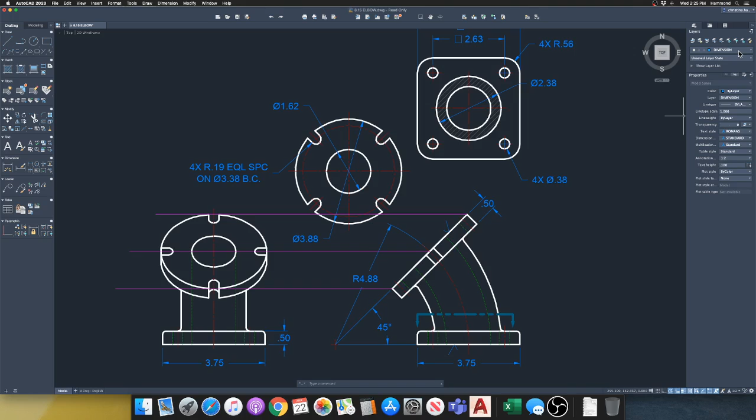I'm going to bring this over here straight across, and I'm going to bring this over here straight across. Okay, I'm going to actually change these to the elevation layer, and that way we can see it a little better.

Okay, so I have this. This is for the front view. Now this right here is a diameter of 3.88. It's this circle, but it is foreshortened because it's at an angle.

So when we have that, we have this center line that goes all the way through here, okay? But the top of it, the very tip top, is from this point over, and the bottom is from this point over. So let's start by doing an ellipse, and I'm just going to type in EL.

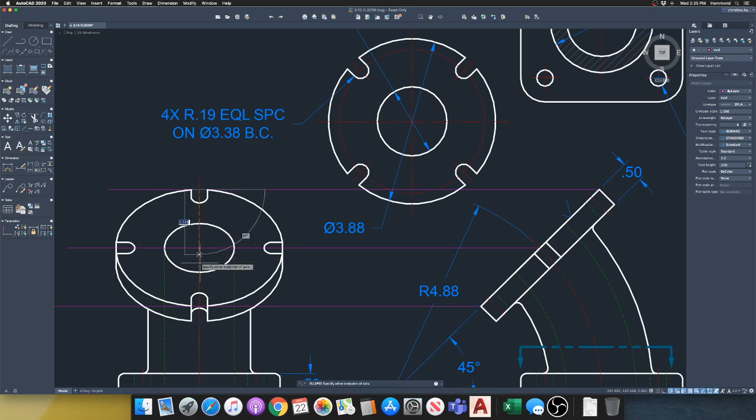I'm going to go from this point to this intersection right here, and then that radius is what we need to find out how wide it's going to go, because it's going from the center point over, not from edge to edge, but from the center point over.

So that's going to be the radius. This is a 3.88 diameter, so that means half of that is 1.94. So I'm going to type in 1.94, and that gets this ellipse that's right here.

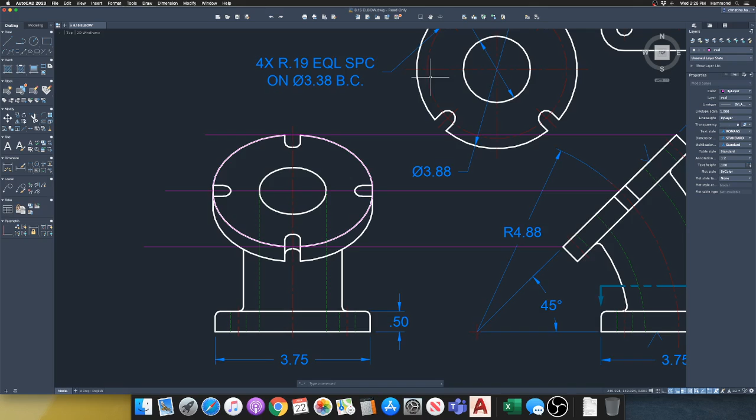Now we need to find out how to get this one in here. And how we're going to get that one is we already know the width of it right here. That is a 1.62 diameter.

And I'm going to draw a line over from where it hits here, straight over, and where it hits here, because that is the hole. These hidden lines right here represent that hole.

So now that I have that in here, and I know how wide it is, but let's say even if I didn't know how wide it is, okay, let's just get rid of this so I can see. This is a blank one, okay?

We're going to still go back to the ellipse command, and we're going to go from here to here, and then to find out how wide it is, we have to do the radius of this 1.62. So that radius is 0.81, and there we have our ellipse.

And put that on the object layer so you can see that. You still have hidden lines going straight down from where this is, which represents how the hole continues on.

So we can go over here to hidden, go to line, go from here to here, and go from here to here. Okay, so that gets us the hole in the center.

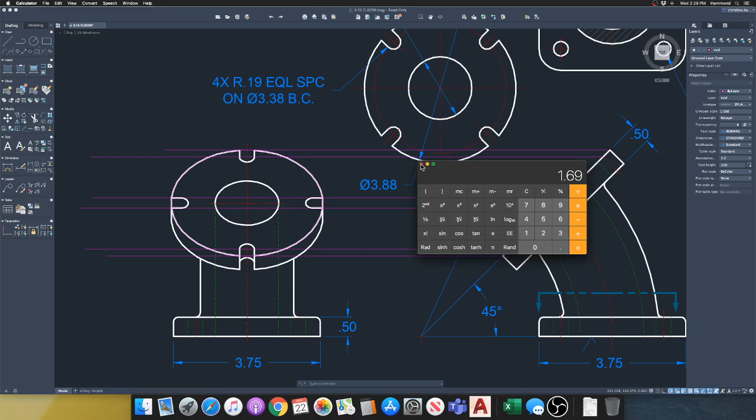3.38 divided by 2 is 1.69, so that is going to be your radius for the bolt circle. Now we're going to go back to ellipse and go from this point to this point and come over 1.69, and that's our center line right here.

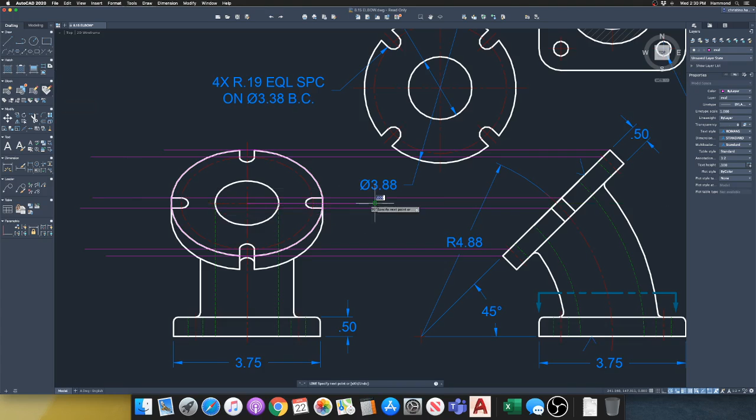Now, because we have this in here, this is our center mark. So if I were to drag a line to here, to get this one in here—remember, that's a 0.19 radius.

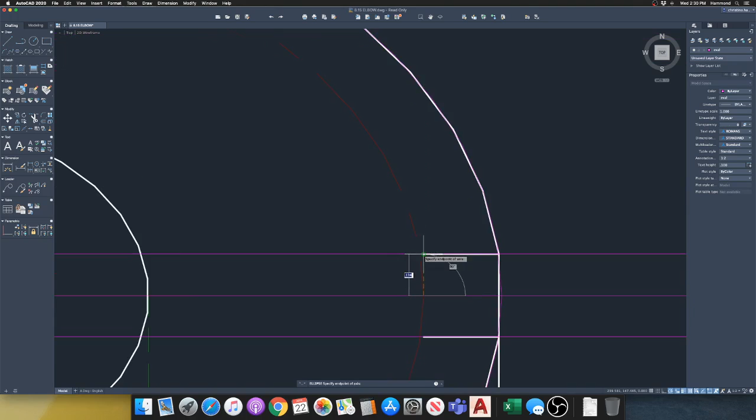We're going to go with the ellipse command, from here straight up to where it hits here. Sorry, wrong one—ellipse. I was going from the center. I'm going to hit C for center point ellipse. I want to go here. My first point up is there, and my radius is 0.19. So that gets that in there.

We can trim out, make this an object, and there you have that.

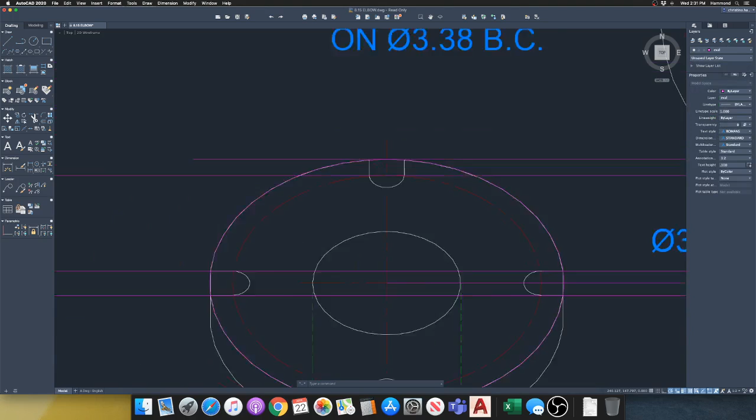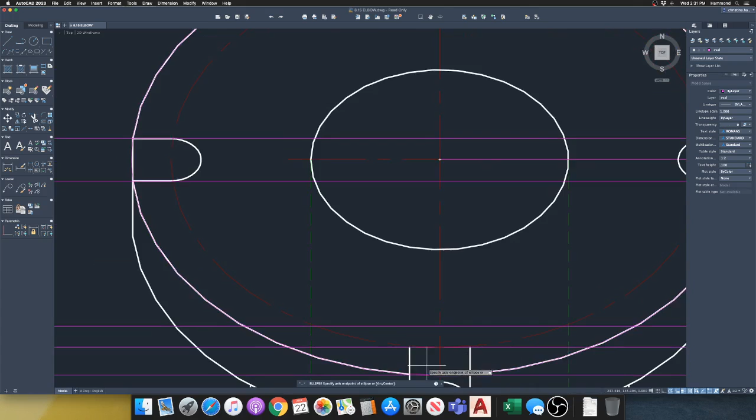Now to get these, if we have a line from the top of this, that shows us where the top of this part is. Here's where it hits on the center, right here. So we're going to do an ellipse. We can go from here to here to here. Take that, change it to object, trim this out. You'll do that on the sides and on the top.

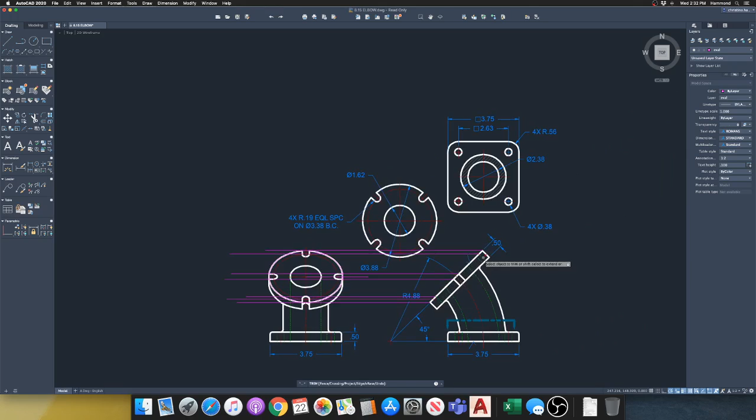Let me just show you though, to make sure you have these over here in the places where they belong. Let me just clean this up a bit.

So to get this in the places where they belong, when this arc comes up and hits right here, that's going to be the point we're going to work with. So I'm going to draw a line, and I'm going to go from this intersection straight down. Now I can hit the perpendicular, and that's going to make it straight across.

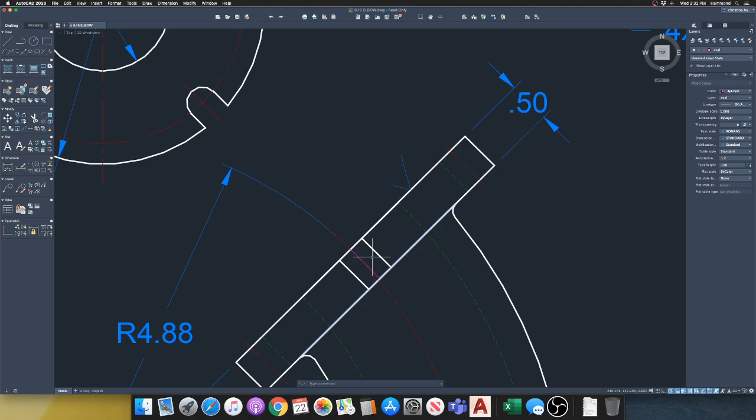Okay, now these, remember, are 0.19. Let me just get rid of those. Okay, so we have an empty spot right here. I'll get rid of these just so you can see that.

Now we're going to offset 1.94, which is the radius of this large circle here. So I'm going to hit this. See, that goes right in where I had it. Okay, that's where that goes.

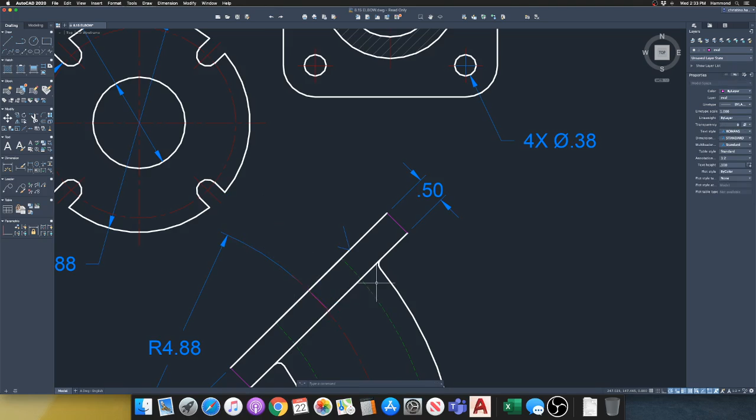Now you have these lined up—they should be lined up. You should be able to go from the center to perpendicular, and that will line exactly straight up. So if you do that, then you can do a line from this point to perpendicular and the other point. Or another way, you have this line here. The radius is 0.19, so we're going to offset 0.19 and go this way and that way. And these are hidden.

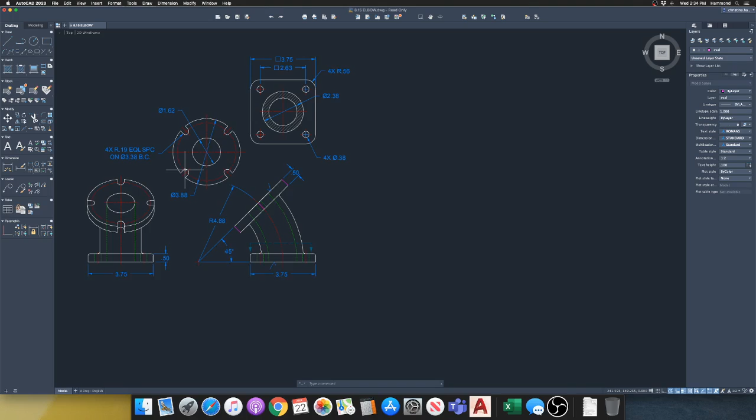All right, for the edge part of this, you can draw a line. If we didn't have this over here, but we do know what this bolt circle is, it's a 3.38. We can offset the 1.69.

These are center lines. Now, don't forget that these center lines do not need to be stopped at this edge. So I'm just going to draw just a circle real quick from this midpoint, and I'm going to come out about that far. That's how far I want those center lines to go.

And then I can just copy that, or I can go back to the circle command, hit right here on the midpoint, hit that, and just hit enter, and that will give me the same size circle. Now I can go to extend, and I can extend that, and that, and that. Then I just get rid of these circles, don't need them anymore.

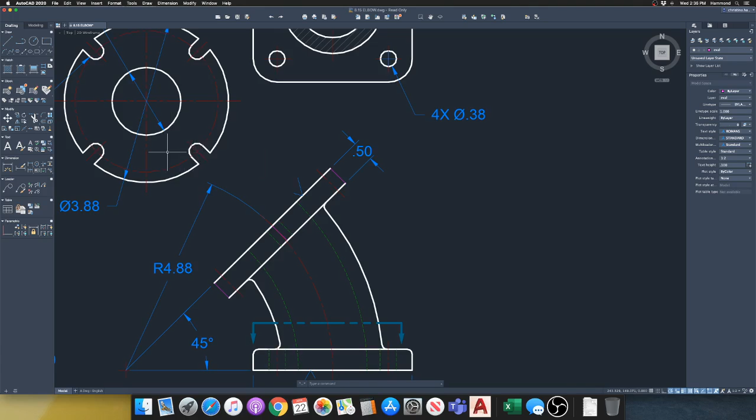Okay, we need these hidden lines here. These hidden lines represent where this hits, okay? If we wanted to find out what that distance is, we have this right here. It is a radius of 0.19. So let's look—this is a radius of 0.19, this one is a 3.38. So we want to go in from here, whatever that distance is, okay?

So we can offset—we're going to take the 1.69, which is the radius of this bolt circle right here, and I'm going to subtract 0.19 from it. Actually, no, I'm doing way too much math. I'm just going to offset 0.19. That's all I need to do. I don't know what I was thinking.

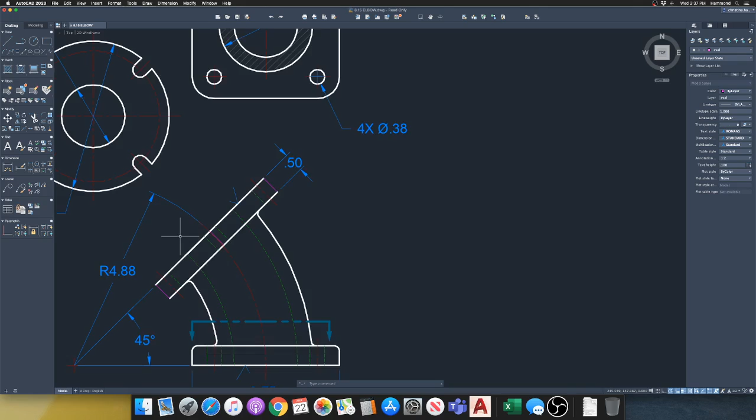Okay, we're going to take this and this, make those hidden. Hit the trim command, and trim that out. So now you have those lines in there. Of course, you will need to go in here and get rid of this line that you did right there, and make that an object line. And there you have it.